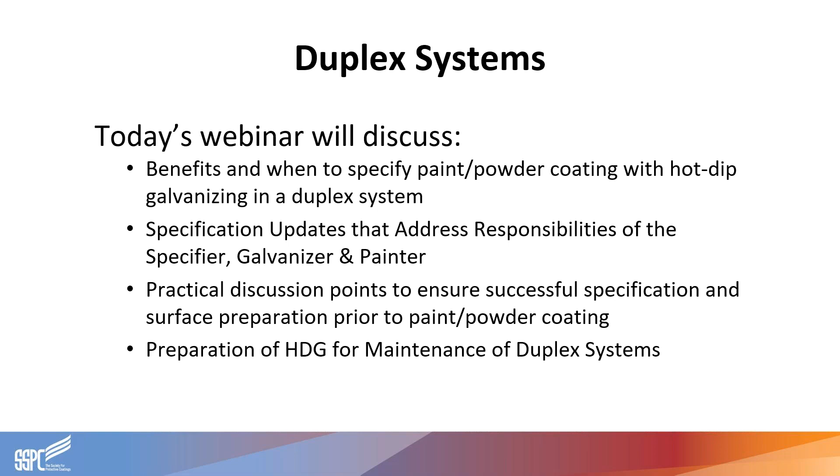Today, I'm going to focus very briefly on duplex systems, which is painting or powder coating over hot dip galvanizing. But to make sure the paint or powder coating will adhere successfully to a galvanized surface, I'm really going to focus on topics that are often overlooked but are absolutely critical in terms of improving communication, clarifying responsibilities, and avoiding common challenges. There are also specification language and research updates that I'm going to share with you today. These can also assist you in these types of discussions. And then we'll finally talk a little bit about maintenance of duplex systems at the end.

Before I begin, just a little bit of background information about the American Galvanizers Association. We are a nonprofit trade association established in 1933, and we serve as a unified voice and provide expertise in the after-fabrication batch hot dip galvanizing industry. We're available for free technical support in North America, and we also provide marketing and technical resources for our member galvanizers.

So before we dig into some of the details regarding specifying duplex systems, maybe not everyone is equally familiar with that terminology of a duplex system. A duplex system is a generic term used in the industry for painting or powder coating over hot dip galvanizing, so that you can achieve the benefits of hot dip galvanizing with the benefits of a protective coating system as well.

And when we say hot dip galvanizing, I'm specifically talking about the batch hot dip process that's performed after fabrication. So this is where steel parts are sent after fabrication, and then these assemblies are immersed in a series of pre-treatment tanks to chemically clean the steel. Then those same parts will be placed in a kettle of hot molten zinc, and that will form the galvanized coating by metallurgical reaction.

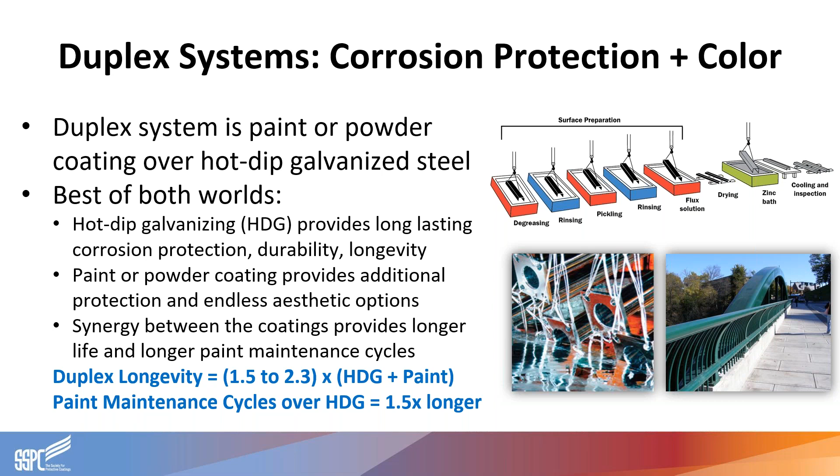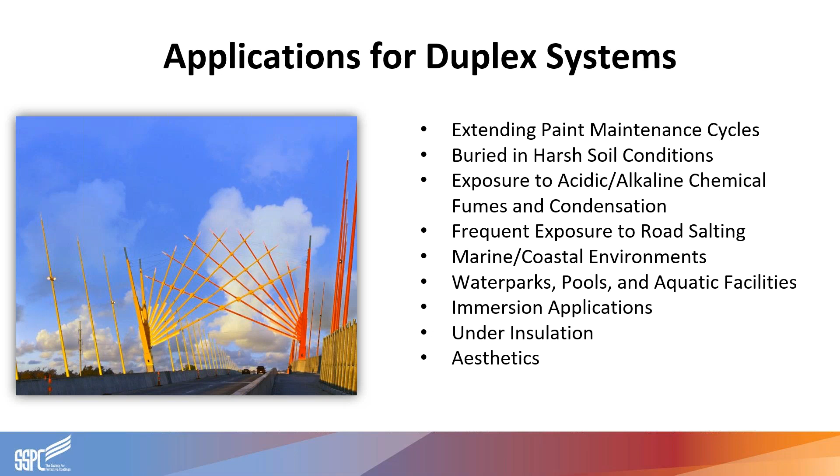Because of these benefits, duplex systems are becoming more common in various industries, especially in applications where we're looking for extended paint maintenance cycles, or there may be exposure to harsh soils or harsh chemical applications, even marine grade applications. Aesthetics and color are often at the top of reasons why hot dip galvanizing is painted or powder coated, just simply for aesthetics as well.

The key to a duplex system's success in these types of applications is that it must be specified, designed for, prepared, and applied correctly. There was a previous presentation in this year's SSPC webinar series that already discussed some common failures, design challenges, inspection and quality concerns that can be present with duplex systems. I'd really encourage you to visit that webinar recording if you get a chance, for additional information beyond the scope of what I'll focus on here, which is mostly communication issues specific to specifying and preparing the galvanized surface.

The reason is that many do not realize duplex systems are often bid by two different contractors. It's true that some hot dip galvanizers will market and sell their own duplex systems, and other galvanizers may partner with a nearby paint shop to provide an all-in-one duplex coating service. However, it's much more common to see these bid as two separate contracts.

So when hot dip galvanizing and paint are bid separately, the galvanizer may not be aware that that part is going to be painted. And beyond that, the painter may not be expecting that galvanized steel is what will be arriving at their shop. This becomes a problem because the standards for hot dip galvanizing allow minor surface conditions to be present.

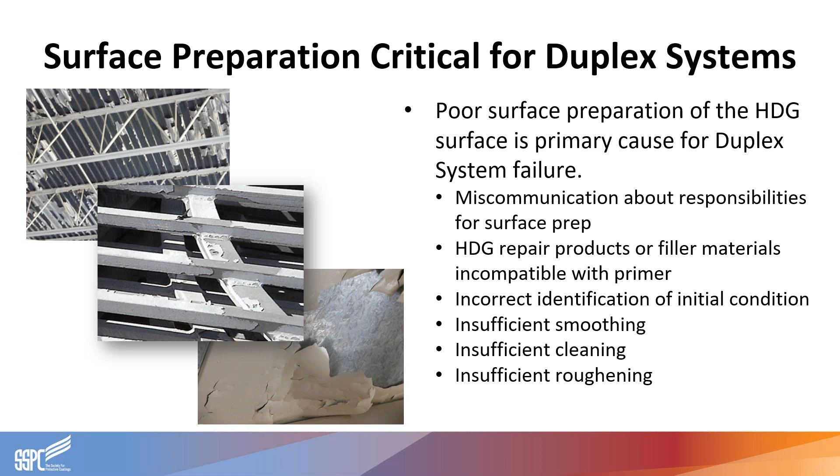And when that occurs, some of these critical galvanizing surface preparation steps, like proper selection of repair materials, sufficient smoothing and cleaning before painting—all of these types of issues may end up being performed to a lower quality standard, or just completely skipped entirely.

Fortunately, there is a lot of information available to help you in specifying duplex systems on a project by project basis, that will hopefully avoid a lot of the common failure modes related to surface preparation and communication issues.

First, there are established standards you'll want to be familiar with for preparing hot dip galvanized surfaces for painting and powder coating separately. ASTM D6386 is the standard we'll use for preparing the galvanized surface for paint. Meanwhile, ASTM D7803 outlines the necessary preparation steps for galvanizing for powder coating application. These standards will be the same whether you're talking about a shop, a field, or a maintenance application.

The two standards are quite similar actually, and this is where the requirements are located for smoothing, cleaning, and profiling of the surface. With powder coating, there's just an extra step required in order to prevent outgassing. However, these standards have a variety of options for surface preparation methods listed within them, so just specifying these documents alone can leave things open to interpretation. Instead, there are some important questions you might want to ask to help determine which options within these standards may be suitable on a project-by-project basis.

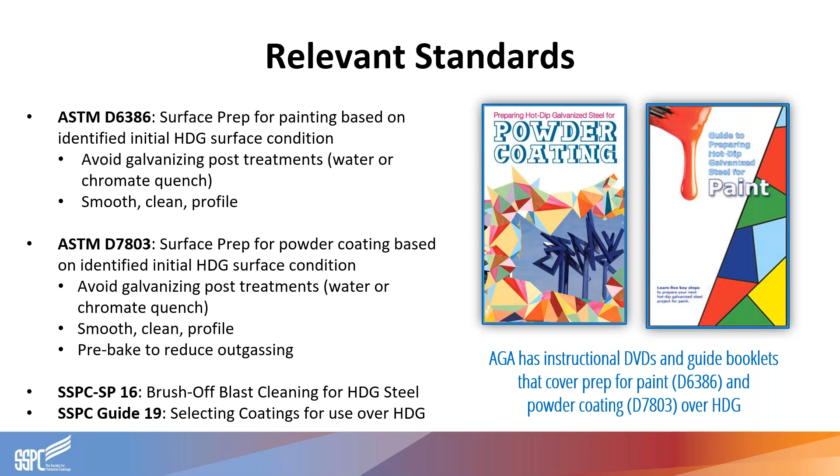Finally, it's the specifier's responsibility to select the paint or powder coating system based on the intended use of the part, the application method, environmental concerns, and the desired aesthetics for the project. You can consult a paint manufacturer for proper paint selection, or reference SSPC Guide 19, which has been developed to help select an appropriate coating system for a duplex system based on exposure environment.

Once these standards have been specified or referenced, there are going to be responsibilities within that standard that need to be delegated or shared between the specifier, the galvanizer, and the painter. You want to communicate and discuss all of these topics before the work begins. The specifier is responsible for informing the galvanizer and the paint applicator that the part will be painted after galvanizing or powder coated.

What this does is open up the line of communication between all parties, and from that step you can further confirm design or specification decisions that might impact their mutual responsibilities.

Once all parties know the material is going to be painted or powder coated, the galvanizer will be responsible for avoiding any type of galvanizing post-treatments commonly applied to help preserve the galvanizing appearance from staining, or to help cool the parts for handling. But there are certain conditions known to impact the adhesion of any applied coating afterwards.

For example, when parts come out of the galvanizing kettle, they're very hot and can't be handled right away. So often they're rapidly cooled by water quenching or chromate quenching solution. These processes have been known to negatively affect adhesion of the coatings applied afterwards.

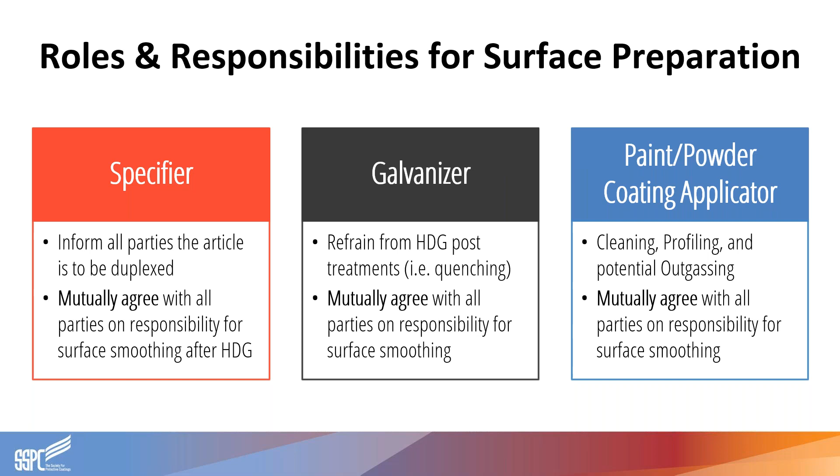Finally, the coating applicator is always responsible for the remainder of the surface preparation requirements beyond that smoothing, like cleaning and profiling. And in the case of powder coating, they'll also be required to perform the steps to prevent outgassing.

The primary specification for hot dip galvanizing in North America is ASTM A123, and that standard was updated to include some language that would help highlight the potential for communication gaps that might occur related to smoothing of the surface in between the galvanizer and preparation for painting.

This new verbiage highlights the need for mutual agreement between the galvanizer and the purchaser, which is really important because not all galvanizers may have the capability to perform all of the surface smoothing at their facility. And at the same time, not all painters are expecting to incorporate all the steps for surface smoothing into their project bid. So similar verbiage was also included in those surface preparation standards, ASTM D6386 for painting and D7803 for powder coating. That was updated in 2019.

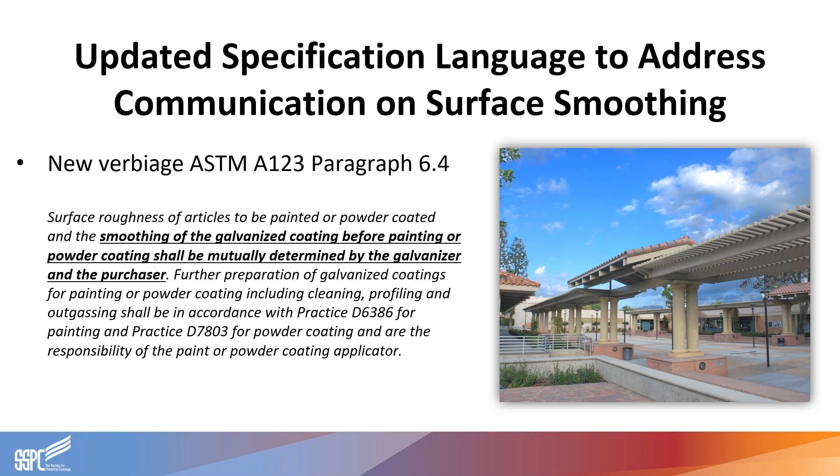Once all parties have been informed that the hot dip galvanized steel will be coated over, the next set of slides I'm going to show you are going to be some discussion aids to help you translate the surface preparation standards for galvanizing found in D6386 and D7803 into practical terms, so that optimization can be had between cost, turnaround time, and general overall effort.

The first discussion point you'll want to clarify is the acceptability of any post-treatments that may be performed by the galvanizer. Galvanizers apply post-treatments after galvanizing, such as water quenching or chromate quenching, to help accelerate cooling. Other methods can be used to dull surfaces or prevent wet storage stain, that white, dusty corrosion product that can form on the surface during storage and transportation.

Some of these post-treatments will alter the surface chemistry and passivate the coating. Phosphatizing or a zinc phosphate quench solution will passivate the surface but also produce a surface acceptable for painting. Others, like chromate quench or water quenching, will leave a surface that's difficult to top coat. Although water quenching doesn't change the surface itself, the quench bath typically contains contaminants that get deposited on the surface and interfere with paint adhesion, which are difficult to see.

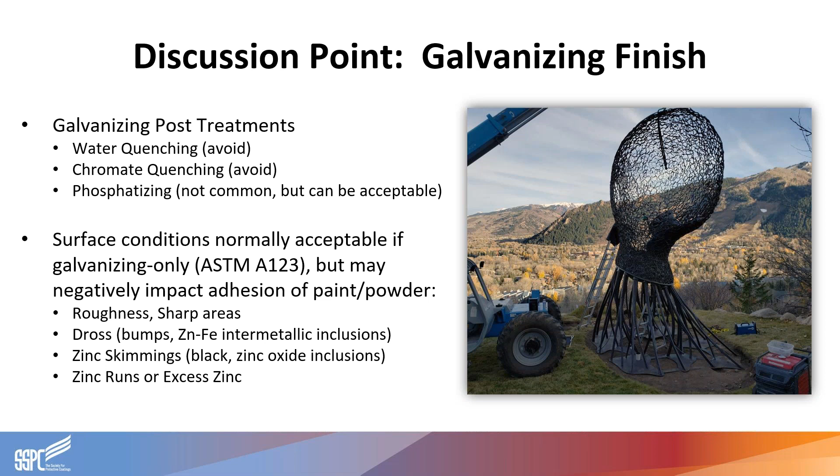The next discussion point between parties would be galvanizing repairs. This topic is not specifically addressed in any surface preparation standard for paint or powder coating, but the acceptability and responsibility for any repairs is definitely worth discussion for a variety of reasons.

Galvanizers are actually required to deliver the galvanized product with full coverage, but some repairs are allowable to be performed at the plant, and they must be performed prior to acceptance. There are three methods allowed for the repair of all hot dip galvanized coatings according to the specification ASTM A780: zinc metallizing, zinc solder, and the use of a zinc-rich paint.

Unless explicitly specified or agreed to, the galvanizer may select any repair material from this list. Regarding painting or powder coating afterwards, if you're utilizing zinc spray metallizing or zinc solder for repair of hot dip galvanized coatings, there's no additional clarification required here.

But if the galvanizer intends on using a zinc-rich paint for repairs conducted at the galvanizing plant, the recoat time windows really should be evaluated by the specifier, because practically, in terms of logistics, you may not be meeting those recoat windows by the time it gets to the paint booth.

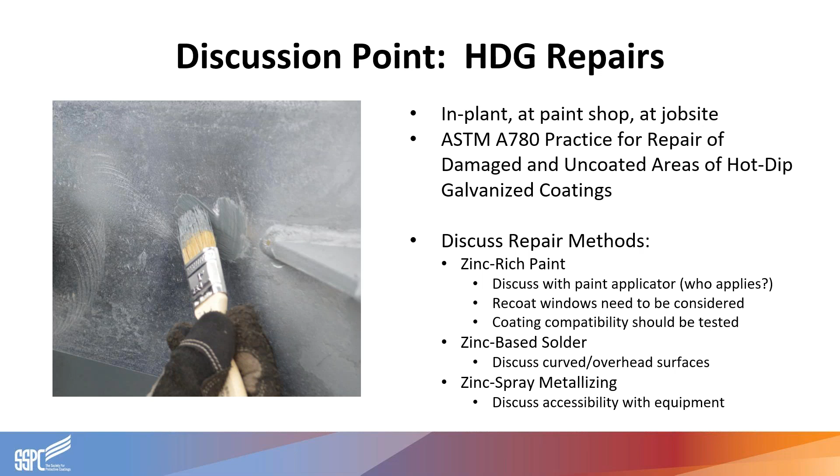Once any galvanizing repairs have been completed, the surface must be smoothed before it is cleaned and profiled to remove those surface conditions I mentioned earlier that can impact adhesion.

The primary goal here is just to remove any high spots, any roughness above and beyond the ASTM A123 standard galvanizing finish, to help achieve a smooth enough surface that's acceptable for the paint or powder coating. But who performs this?

Is that the galvanizer? Is that the painter? Is it both? Often this particular step is the one that's most overlooked and left out of project bidding as well. The galvanizer can be made capable of smoothing out the coating, taking on that responsibility at the galvanizing plant, but not all have the capability or space. So it varies from galvanizer to galvanizer.

But in all cases, a combined effort between the galvanizer and paint applicator can go a long way to making sure that any problematic areas are all identified and smoothed.

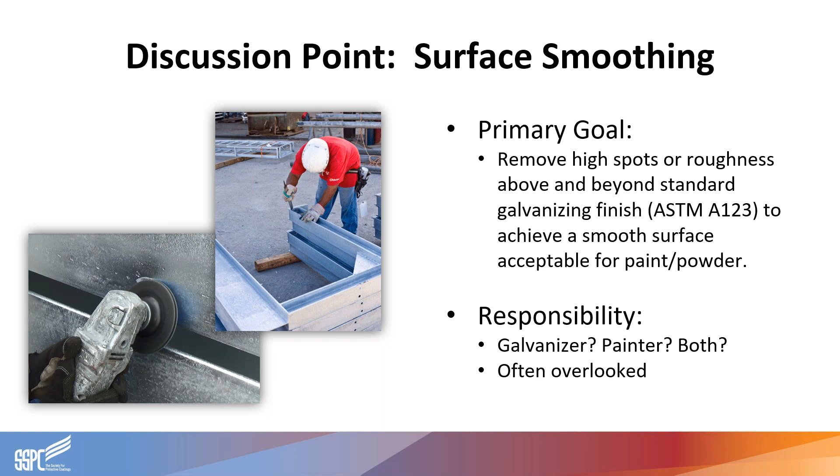When it comes to actually smoothing the surface, ASTM D6386 and D7803 allow you to specify hand tool cleaning or power tool cleaning for surface smoothing. However, if you're working with someone unfamiliar with hot dip galvanizing and duplex systems, be aware they could easily damage the galvanized coating when using power tool cleaning. So take a lot of care in that procedure.

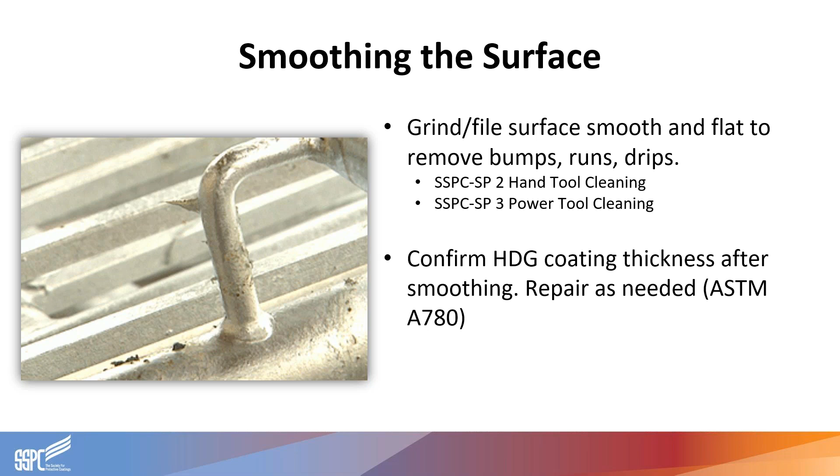So we talked about the roughness or high spots, but it may also be desired to fill in low spots or depressions to even out divots or indentations in the galvanized coating to further achieve a smooth surface. We also see this when looking to paint over vent and drain hole plugs, which have been pushed in to fill in vent and drain holes. Sometimes these are pushed in a little too far, and there can be a discrepancy in the height of the coatings there. I see this most often on projects with elevated smoothing or aesthetic requirements, such as architecturally exposed structural steel, but also other high visibility project types.

If you're looking to achieve a smooth, paintable surface in these areas, you may need to specify a filler material that the galvanizer or painter can easily apply. But you'll want to confirm with the paint manufacturer whether that specified filler material is compatible with the primer coat, and be sure to identify who would be responsible for acquiring, applying, and smoothing that filler material.

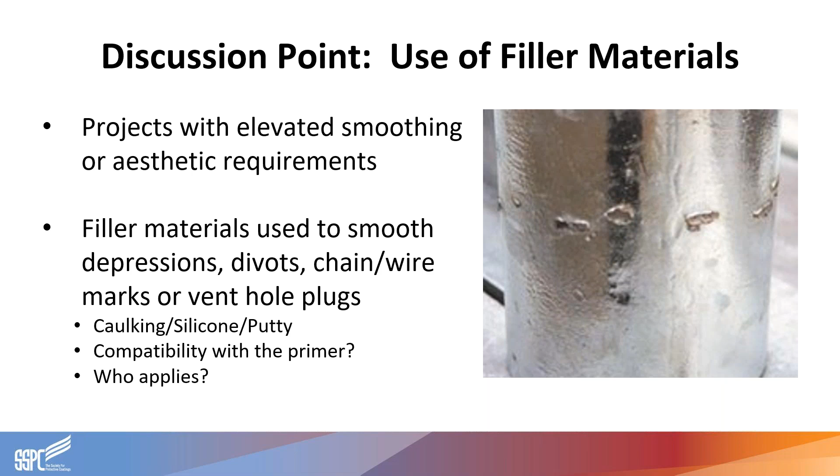Once the surface is smooth, the next steps required are to clean and profile the surface. The steps involved will depend on the time allowed before painting, where zinc oxides and zinc hydroxides will form on the surface, and eventually, over time and exposure to natural wet and dry cycles in the environment, it'll develop a protective patina made out of zinc carbonate.

An earlier SSPC webinar in this series went into a lot more detail about how to identify these classifications and discussed some difficulties in practically identifying them, so I'm not going to delve in too much there. I just want to focus on the practical logistics of many projects, which often translate to the fact that the galvanized pieces leave the kettle and reach the paint booth, but they don't ever make it in time to maintain the newly galvanized condition.

There's going to be zinc oxides and zinc hydroxides very likely present in that time period, and these will need to be removed before the parts can be successfully painted. This is known as a partially weathered surface, once a galvanized surface has started to allow surface oxidation to occur. It's the most common surface condition that the coating applicator is going to run into.

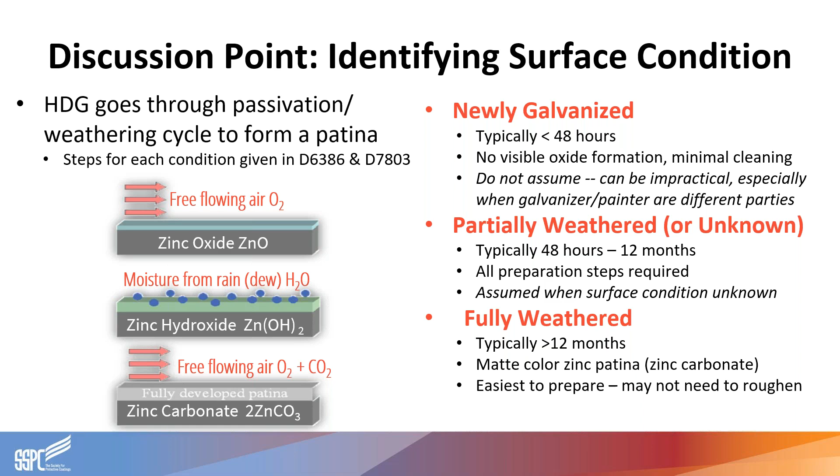So once the condition of the galvanized surface has been properly identified, or assumed as a partially weathered surface, you'll need to clean the surface of dirt, oils, grease, or other surface contaminants. ASTM D6386 and D7803 mention organic contaminants and surface oxidations can be removed with an alkaline solution, an acidic solution, or through solvent cleaning.

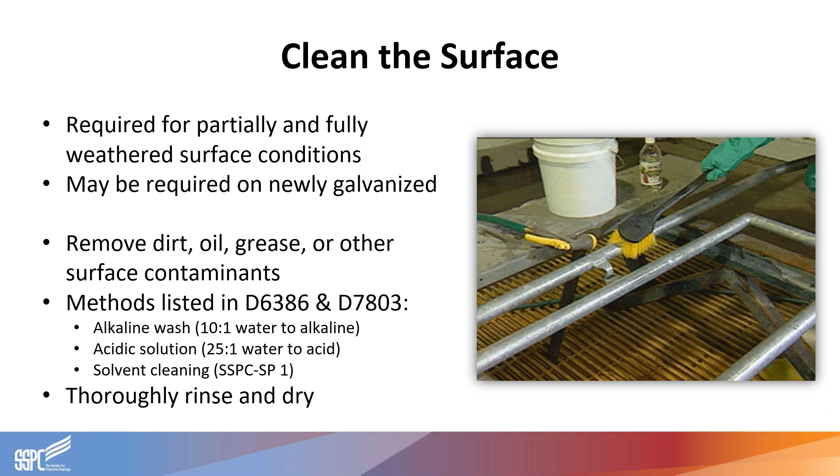But especially where acidic and alkaline cleaners have been used, you want to avoid letting that sit on the material and attack the coating during cleaning - you want to be quick with it. It's strongly recommended to heed those suggestions in the standard regarding time period, but also rinse the material thoroughly, and preferably rinse multiple times. Anytime this is left unhighlighted or unspecified, and a paint applicator may not be familiar with galvanizing, they may not feel the need to heed those recommendations, so highlighting this concern can aid in preparing duplex systems.

Next, most galvanized surfaces will need to be roughened to promote adhesion of the coating that's going to be applied. Although weathered galvanizing is known to have some natural roughness that can be painted over without additional roughening, if you're applying an industrial or marine grade coating, or a coating with significant peak height or roughness requirements, that may not be sufficient to paint over as is. So regardless, this is where the specifier needs to step in and clarify whether you're dealing with newly, partially, or fully weathered galvanizing.

The specifier needs to give some input on the methods available for surface roughening. Depending on whether you're painting or powder coating, these may include brush off blasting per SSPC SP16, which is the most common, surface grinding in accordance with SSPC SP11, the use of a zinc phosphate solution, or a wash primer or other acrylic pretreatment. I'm going to review some of the considerations that can arise in each case.

But if you leave the roughening requirements unspecified and fully up to the contractor, there may be instances with an insufficiently roughened surface for the coating you're trying to apply over galvanizing.

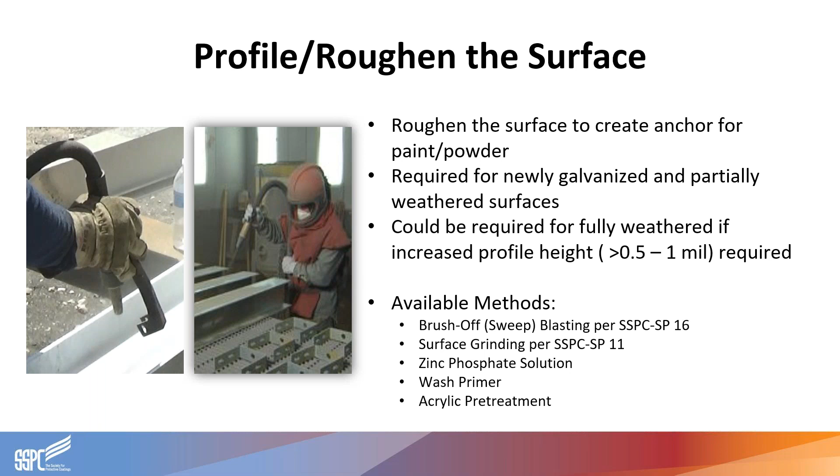The most commonly specified method for preparing galvanized steel for paint or powder coating is brush off blasting standard SP16. This applies not only to galvanizing, but also to stainless and other non-ferrous metals like aluminum.

This standard requires that abrasive blasting for galvanizing be performed at 30 to 60 degrees and at lower pressures. You'll also use more rapid nozzle movement and softer, finer abrasives to achieve a minimum 0.75 mil profile height, with procedures to assist without damaging the coating in that process.

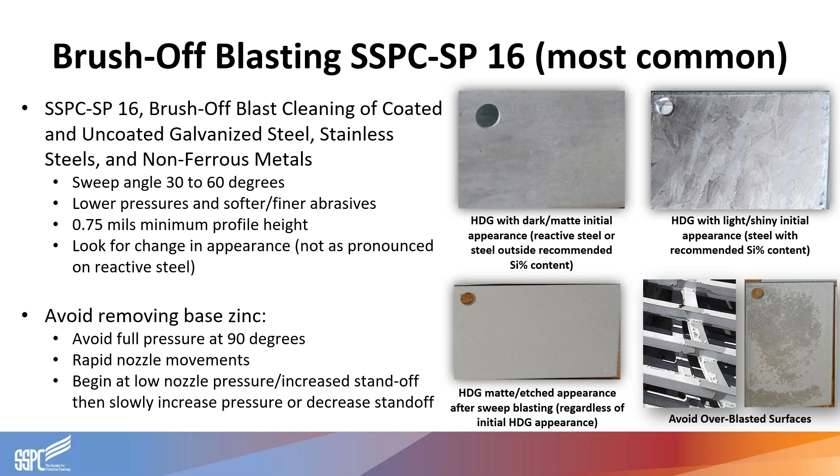Within SSPC SP16, and also within D6386 and D7803, there are recommendations for organic or soft abrasives that can be used to minimize damage to the galvanized surface. These typically are organic media or media with a Mohs hardness value less than 5, and you may also consider finer mesh sizes.

Organic media such as corn cobs and walnut shells, but we've also seen crushed glass make that recommendation list as well. These recommendations can certainly be suitable for coatings that require a clean but only lightly roughened surface. But they may not always fit the bill if you're trying to achieve the rough surfaces required for thicker or industrial grade coatings that may need significant profile height or angularity, such as epoxies, high build coatings, or polyurethanes.

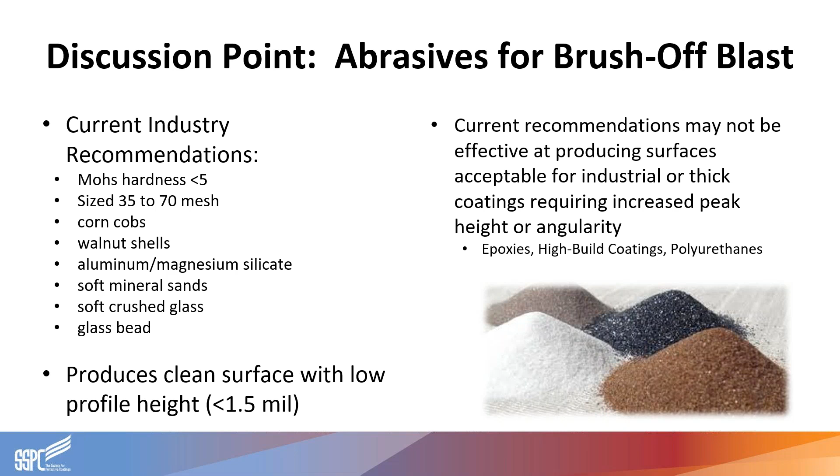So in the marketplace, to get around this issue, specifiers and applicators have been looking outside the typical abrasive recommendations, and instead turning to harder or coarser sizes available from mineral sands or other inorganic products and mixtures.

Overall, the use of these products has been met with mixed success. The reason for that is you might hear someone say they had great success using garnet over galvanizing, while someone else had a poor experience. The reason is that without certain mitigations, it can be very easy for someone unfamiliar with hot dip galvanizing to damage the surface with these materials.

Another issue is the blast media doesn't give the same surface roughness properties, such as peak height, when used over a galvanized surface versus a bare steel surface. So you can't just take the spec sheet from an abrasive supplier and apply that directly to a zinc coated surface.

So to kind of wrap our head around this issue, the AGA completed a study last year that evaluated different types of mineral sands and inorganic abrasives. And what we found was that the nozzle pressure and abrasive size were two of the most influential factors related to changes in the surface profile properties and the likelihood of coating damage.

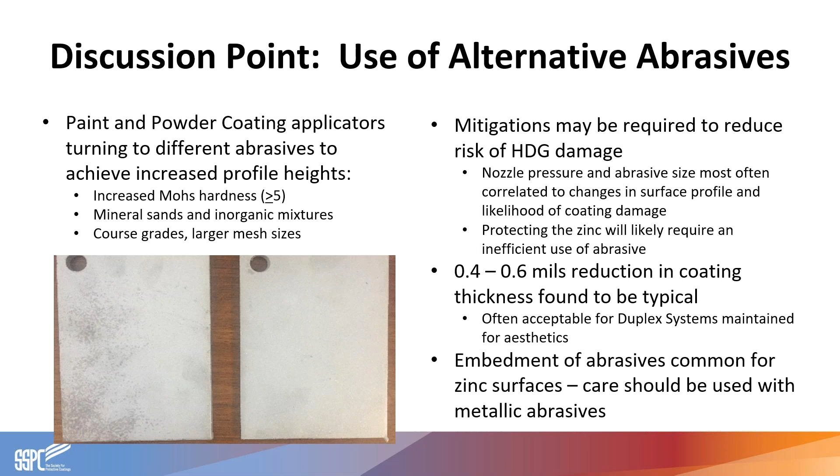Another method available to roughen the coating is the use of grinders and sanders. The details are prescribed in SSPC SP11 for power tool cleaning to bare metal, so that's going to provide a profile of at least 1 mil. If you're looking to achieve significantly greater profile heights, you may want to consider a practical test to determine whether you need to be looking at abrasive blasting to achieve that instead.

When performed carefully and with low force, this can be a suitable preparation method for many coatings, but it is possible to damage or thin the coating if someone goes a little crazy with the power tools. Grinding zinc, for example, doesn't produce any sort of sparking. So if you do see sparks with the use of grinders and sanders related to galvanizing, it means you've somehow made it all the way down to bare metal.

ASTM D6386 does allow up to 1 mil reduction in coating thickness if this method is selected, so again, that's another topic that should be evaluated on a project basis. Grinders and sanders also produce significant zinc dust on the parts in comparison to other roughening methods, which can lead to more rapid zinc oxide formation in humid conditions. So you want to make sure that if this is going to be used, there is a way to get from surface prep to painting as soon as possible.

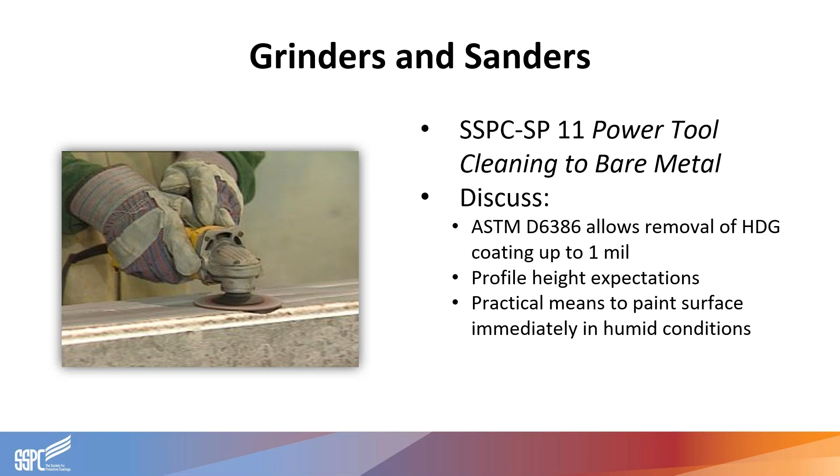A wash primer or self-etching primer is where we look at a metal conditioner to neutralize surface oxides and hydroxides, but it'll also etch the galvanized surface to give you a surface suitable for painting. SSPC Paint 27 addresses more of the material application and inspection of wash primers, and there are other options to meet environmental requirements as well.

When considering a wash primer, the topics to discuss in terms of duplex systems is again the use of galvanizing post-treatments. Wash primers are not going to be able to be applied over a water quenched or chromate quenched surface, just like normal, but they also cannot be applied over a zinc phosphated surface.

You should also discuss the compatibility between the intended wash primer and the top coat. Wash primers are not typically compatible with all coatings, so you may present challenges with thicker coating systems as well.

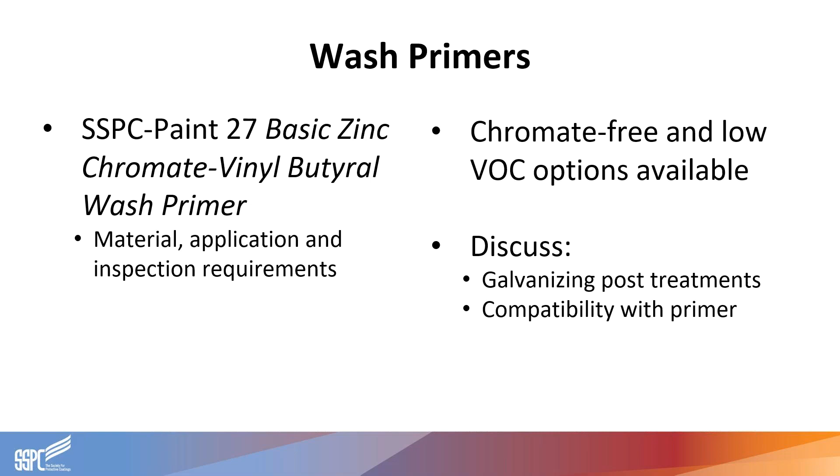Another method for profiling the galvanized surface is to passivate the surface with a zinc phosphate solution. We kind of touched on this before. This solution reacts with zinc metal on the surface, and you get a layer of zinc compounds that are tightly bonded to the surface, protect from oxidation, and you also get a roughened surface out of that, which you can paint or powder coat over.

There's a variety of proprietary solutions designed to work well over galvanized surfaces. You can brush apply, spray apply, but there are also some galvanizers that offer this as a post-treatment at the end of their galvanizing line as an immersion process. So you'll want to consider the manufacturer's recommendations for the paint and whether the type of surface produced by the zinc phosphate treatment is suitable.

There's also some concerns regarding baking temperatures and exposures above 535 Fahrenheit. The zinc phosphate conversion coating can turn into a powdery substance above this temperature that can affect adhesion.

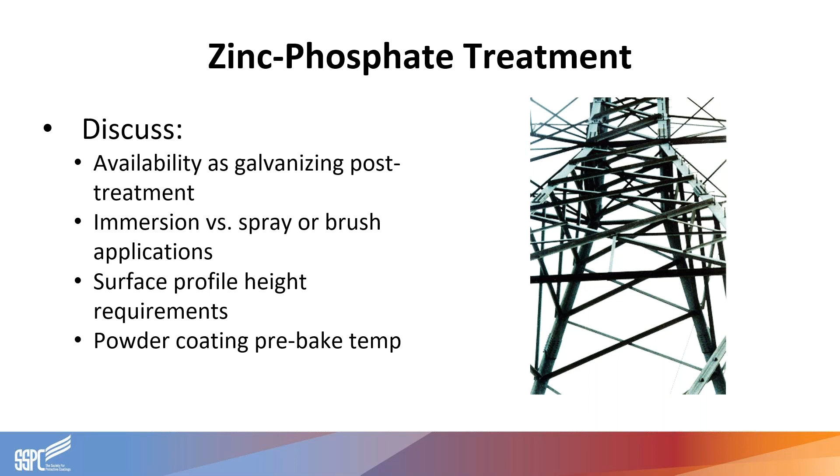Pre-baking is the next step specific to only powder coating. Once surface roughening has been performed, you're ready to apply the coating, but you need this intermediate step between surface prep and application of powder coating. This is to prevent pinholes or blisters in the powder coating that can occur if you have any trapped water vapor or air within the natural roughness of the zinc coating, which can expand and then leave the surface during curing of the powder coating, leaving you with those small craters or blisters.

The reason I bring this up is because ASTM D7803 includes a procedure for pre-baking that needs to be clearly communicated to all parties regarding what the pre-bake temperature will be. It's typically about 50 to 65 degrees Fahrenheit above the curing temperature. For most powder coatings and equipment capabilities, this is not a big concern, but at the high end of cure temperatures, you may need to consider capabilities and any limitations if you're using that zinc phosphate treatment.

Finally, you're ready to coat the galvanized steel, and the powder coating should follow baking as soon as possible. Again, you're always concerned about making sure that you're not allowing any time for zinc oxidation to begin.

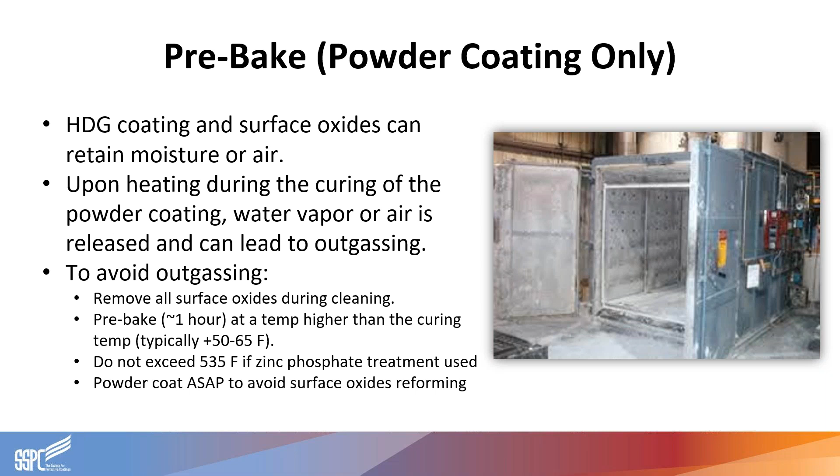The last thing I'll mention related to specification and communication as it relates to surface prep is maintenance painting, which often doesn't get talked about very often. When hot dip galvanized steel is painted or powder coated, more often than not that coating is maintained, probably for aesthetics, but also for increased longevity, depending on the project.

Where you have just minor maintenance or touch-up of the paint, you may or may not be dealing with the exposed galvanizing layer. But either way, the contractor needs to be very clearly alerted that this is a duplex project, so that when they go in to make repairs, smooth out areas, feather in repairs with a grinder, or if they're using abrasive blasting, we want to make sure they're aware that the galvanizing layer is underneath so they don't damage it.

If we're looking at a full recoat with removal of the existing coating, obviously there are a lot of ways to do that, but you would want to consider methods that are going to preserve the hot dip galvanized coating. You can use paint strippers or power washing, as long as pressures are held below 1450 psi, so that you avoid damaging the coating.

If the contractor is aware of the galvanizing underneath, it may be possible to preserve the original surface profile beneath, so maybe the only cleaning required is in the field, and you don't have to spend extra time roughening the surface. However, you may want to still be prepared for any unknown or damaged conditions.

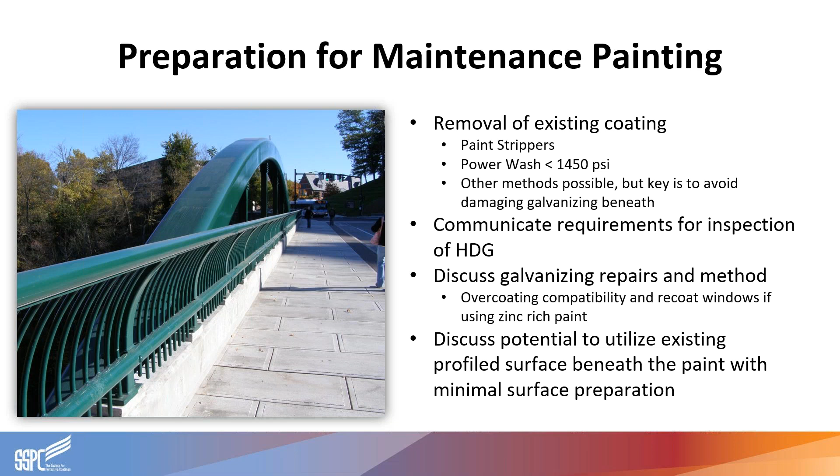All right, that wraps up some of the discussion points that I had. I hope that I was able to communicate that the specification of duplex systems, it's simple. There is a lot of guidance out there for you, but to succeed you really need clear communications about the different options available to you in the standards, and that will help also with a clear division of responsibilities so that you do have a successful duplex system.

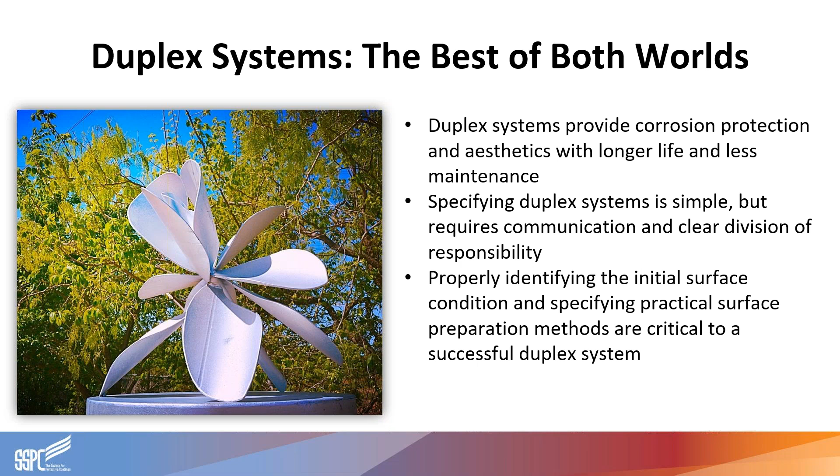So that wraps us up, and if anyone has any questions, I'm happy to answer.